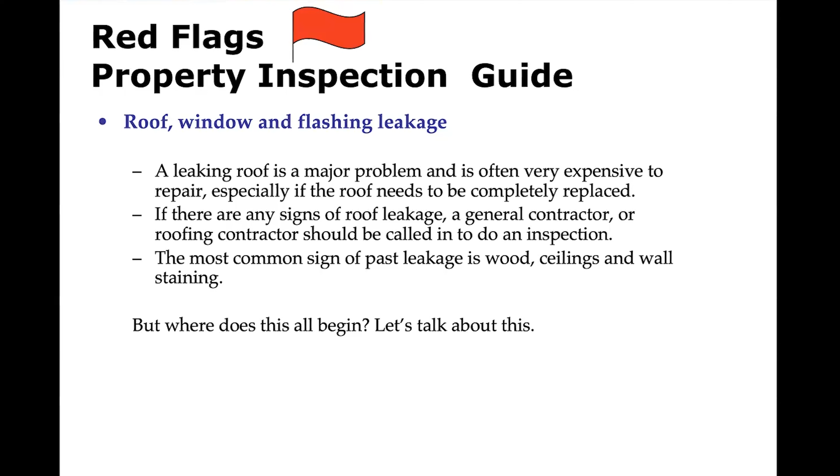Just keep an eye out for those kinds of things, and don't try to sugarcoat everything. Our job is just to report what we see. You don't have to tell them exactly what it's got on it. Just tell them it's an improper repair, and recommend a professional roofer come out to further evaluate it.

And we talked about the window flashing details. I put this in here because it'll show you some. Let me slow down for a minute. If we're in the framing stage of a house, we went out and did some in-field training with our videographer AJ and a couple of professional inspectors and manufacturers in Texas, and those videos will be coming out soon online. You'll be wanting to see those because they are awesome, some of the best video information I think you'll ever see.

Not excluding this one, of course, but self-adhesive flashing. During the framing stage, before the windows are installed, this type of flashing detail has to be installed. You see how they've done it in several different areas here, different ways, but they make a manufactured flashing that fits into the opening, and it overlaps the inside, goes up the wall a bit, laps on the outside, and then they come around and put tape around the outside of these windows and seal it. That makes a very good flashing.

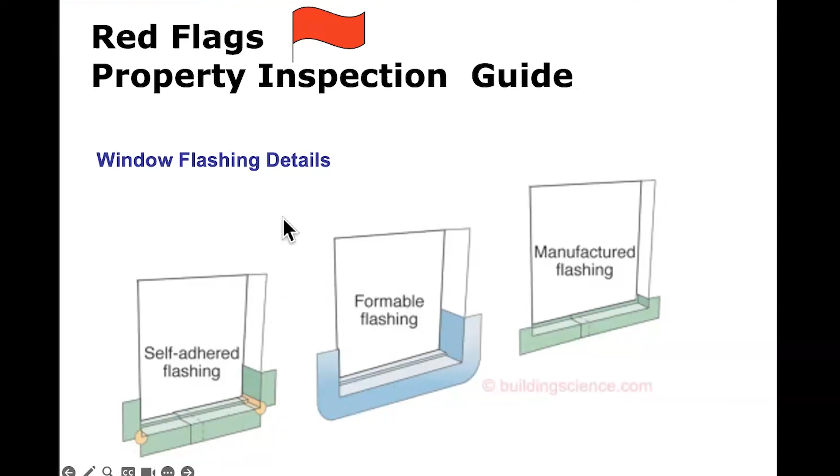But there's some that you can form to fit the window. These are self-adhesive, they stick, but it covers that entire bottom seal of the framing, up the wall section, and wrapped around the outside, and then we'll correct the rest of it as we put the seal around the outside of the windows. So during the framing stage, this is something you should see in all window openings.

Okay, window flashing leakage in a home constitutes a serious problem, can cause significant damage if it's not detected. A leaking window flashing is a major problem, often becomes very expensive to repair.

The most common signs of past or present water intrusion are wet stain areas, wet areas around the walls, baseboard, doors, windows, damaged wood, damaged ceilings, or even wall sections. And it depends on where the stains are at as to what may have caused that.

But sometimes in a ceiling, let's say you see a water stain - if it's a two-story house, it could be an upstairs bathroom over that area, close to that area. It could be a plumbing pipe ran in the ceiling space that could cause that.

The old galvanized water pipes are prone to leak during freezing. So if you've got freezing temperatures and pipes haven't been correctly replaced or insulated, they could cause water leaks. Those issues, if they go on long enough, cause major problems. If there's any signs of water intrusion, then a general contractor, and maybe even a mold specialist, should be consulted to do further evaluation.

We all know what mold looks like. Some states, like Texas, we're not supposed to tell them that it's mold if we see it. You can say it appears to be a mold substance or something, and recommend further evaluation. But in other parts of the country, you can use the word mold, I'm sure, without any problem. Texas has some really different rules and regulations than what some states do.

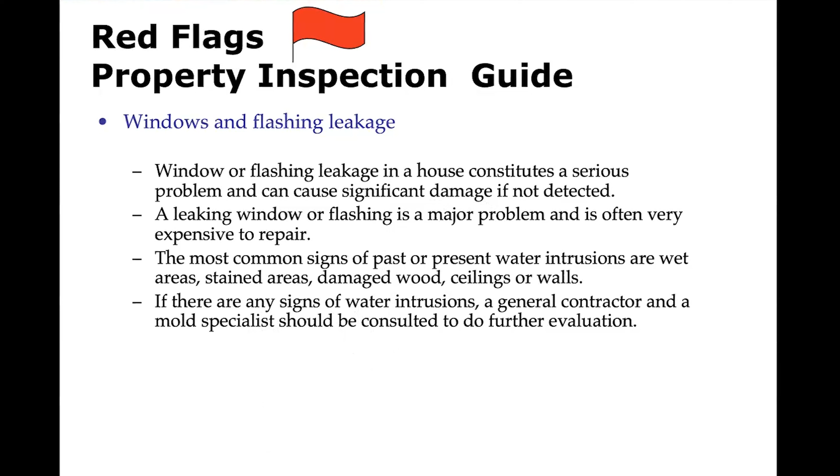So depending on what your area is, if you spot something that looks like mold, your clients are going to know what mold is just as well as you do. So just be cautious with how you say it, but you definitely want to tell them that there's moisture.

Mold produces tiny spores to reproduce. Mold spores enter through the indoor and outside air continuously. So mold is all around us. It's not only on the inside of a house if there's mold spores, but it's also on the outside. The mold people can check inside and outside and compare the difference in mold spores that are there.

But mold spores seem to land on these damp spots indoors. They may begin growing and digesting whatever they land on to survive. Molds can grow on wood, paper, carpet, the backing of the carpet, and even food products.

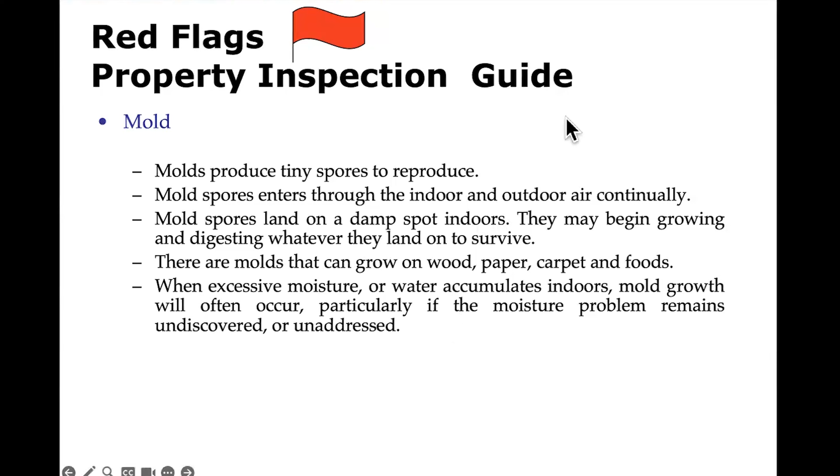When excessive moisture or water accumulates indoors, mold growth will often occur, particularly if the moisture problem remains undiscovered and unaddressed. Sometimes people cover up stuff. If they're selling a house, they will go to all types of extremes to hide moisture and mold because they don't want to pay for someone to come in and do the corrections on it, because at times it can get quite costly.

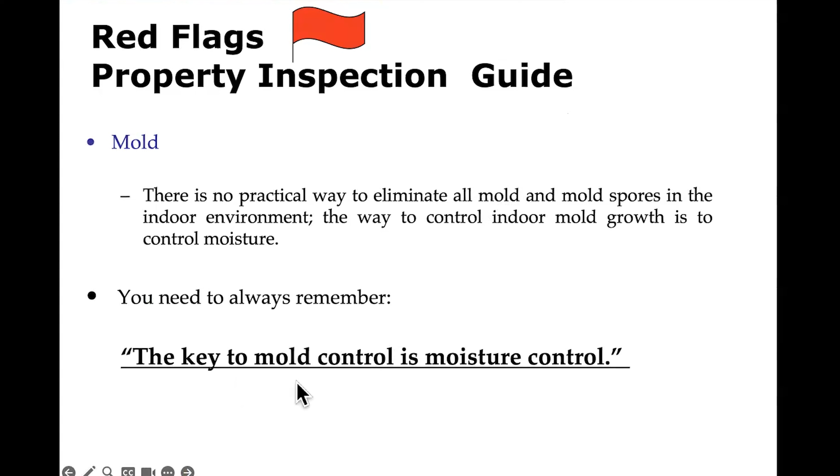There's really no practical way to eliminate all mold spores in the indoor environment. The way to control indoor mold growth is to control moisture. Stop the water, stop the leakage. You need to remember, though, the key to mold control is moisture control. Stop the water leakage, and you'll stop the mold inside.

Many areas are prone to mold growth, generally caused by water intrusion or even a plumbing leak. Many times, if a shower leaks in a wall or the bathtub drain leaks, if you open the trap area, the access to get into those sections, then you'll see that there's intrusion of water and the mold begins to develop. If it's not treated or taken care of, it becomes a very big issue.

Kitchen cabinets, one I've seen time and time again in my inspections. You open the kitchen cabinet doors, look underneath the sink. It had a mold smell that would nearly knock you out because it's so strong, because there was a water leak. And guess what? Nobody took care of the problem. So it continued until it began to develop into mold.

But if you spot something like that, it's not just going to be underneath the sink that you see it. The water will go underneath the bottom cabinet section, the board on the bottom of the cabinets. It gets underneath there, and then it begins to spread in areas that you don't see, but it's magnifying and getting worse and worse as the days go by without being treated. So again, the key to mold control is to control the moisture.

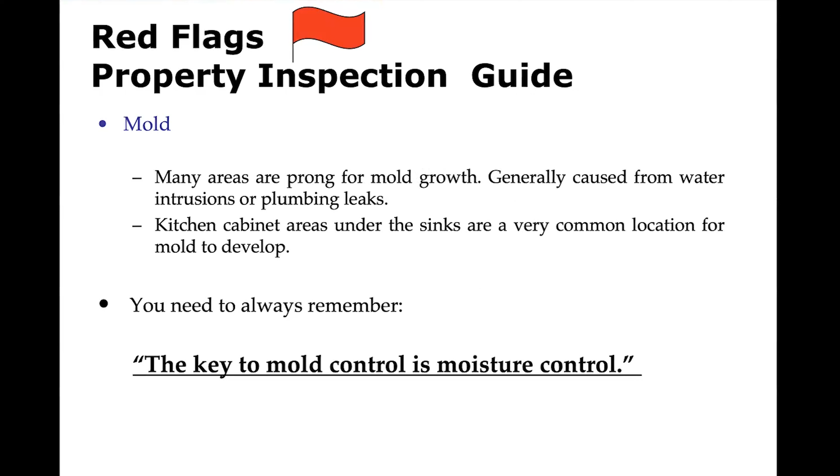Okay, we're going to flip over to stairs, handrails and guardrails now and go over some of this. The codes tell us that a handrail should be provided on at least one side of each continuous run of treads or flights with 4 or more steps. So if you've got 4 or more steps going up a flight of stairs, you have to have a handrail. Inside or outside, doesn't matter.

The handrail height shall not be less than 34 inches from the floor and not more than 38 inches from the floor. I think I said feet, I'm sorry. 34 inches from the floor, not more than 38. That's what most people, children, short adults, tall adults, can reach.

Porches, balconies, or raised floor sections located more than 30 inches above the floor or the ground shall also have guards of not less than 36 inches in height. Now, if you walk up there and you're an average guy, let's say 6 foot tall, and the guardrail around the porch or balcony comes up to your knees, then that's an issue, because someone could trip and fall, or someone could be shoved and fall right over it. So that's why the guardrails have to be 36 inches in height.

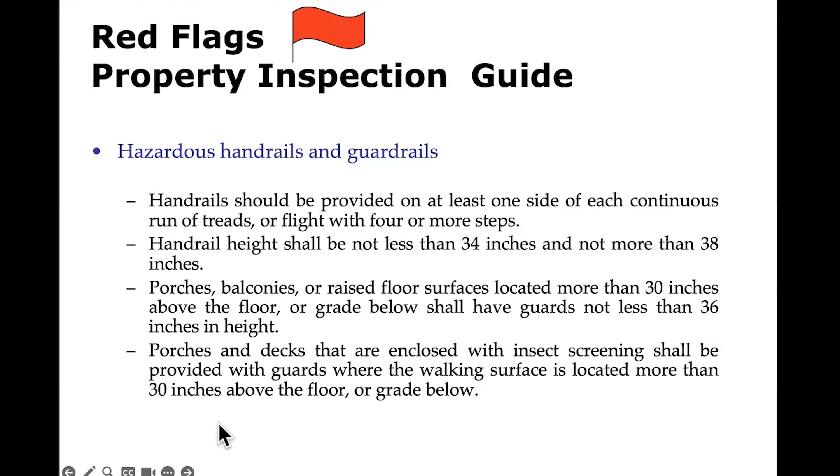Many times we see people put a set of steps up to a porch that they've added onto a place. And they forget to put guardrails. They forget to put handrails on the stairs. Well, everybody's not as balanced as you are in your younger years. A lot of times we could take a fall and not hurt us. As you get up in age, some people have handicap capabilities that can cause them to trip or miss a step and fall. But handrails are very important. So pay attention to these and keep in mind what these requirements all are.

Required guardrails on open sides of stairways, raised floor areas, balconies, and porches shall all have an intermediate rail or ornamental closure that does not allow passage of a sphere 4 inches or more in diameter. A lot of times the code will take a 4-inch round circular piece of styrofoam and use it to measure to make sure nothing any larger than that will pass through the opening.

The reason behind this 4-inch separation requirement is to protect small children, even small pets, that can slip through these openings and fall and injure themselves, or even worse, if it's on a balcony or elevated part of a second or third floor of a house. So the 4-inch rule is a biggie. You can take a tape measure and measure 4 inches, and you'll be pretty safe. But anything larger than 4 inches that passes through the openings of the stair rail, balconies, or the balusters should be written up. That's a red flag for you.

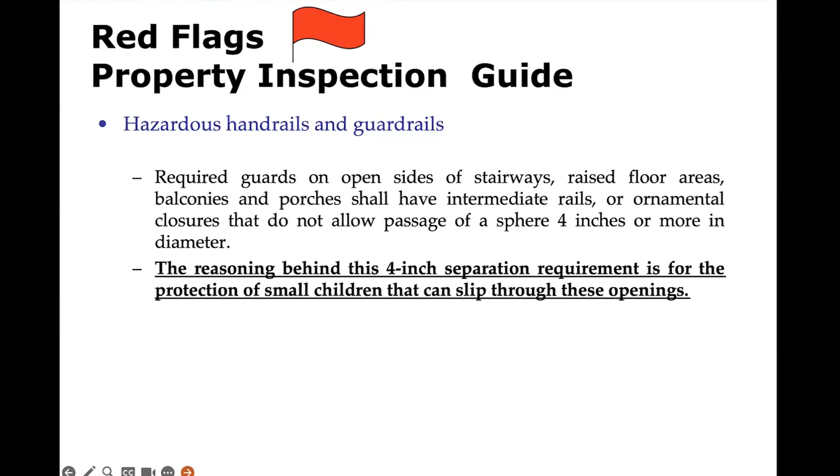Older construction, probably built before the 1990s, didn't have that same requirement. So some of them, I would almost fit through, the space was gapped so far. And there's a lot of ways that people can correct those. But again, as a home inspector, it's not our job to correct it or tell them how to correct it or what to do about it. It's our job to point out, hey, this could be a safety issue. We want to make you aware of it.

Handrail ends shall be returned or shall terminate in newel posts or safety terminals. Handrails adjacent to a wall shall have a space of not less than 1.5 inches between the wall and the handrail. This means where you put your hand around, you want to be able to get a full grip on that handrail. That gives you enough room for the knuckles of your fist to bend and wrap around the handrail and hold on to it.

The end where the handrail returns, at the bottom or the top of the handrail, can't just be open. In other words, you don't want it where a lady's purse strap or loose clothing could get caught on it and cause someone to trip. Those ends have to turn and go back and touch the wall. So if you have a straight handrail, the very end of it is going to make a 90-degree turn and go back and end at the wall. That's what that's telling you.

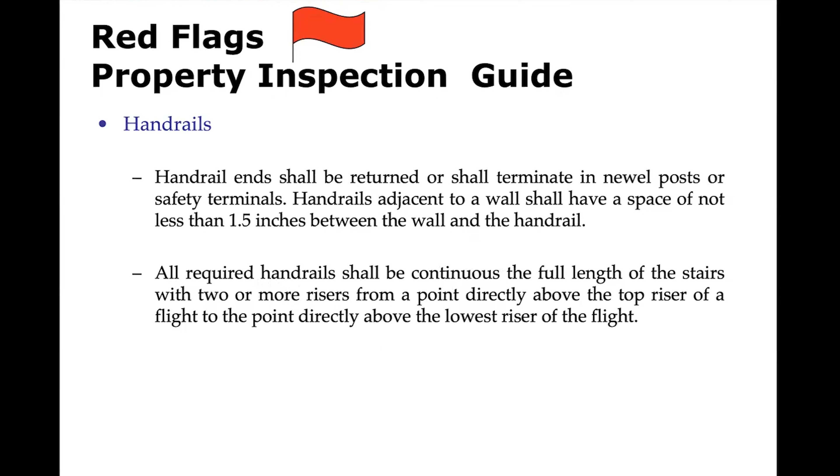All required handrails shall be continuous the full length of the stairs with 2 or more risers, from a point directly above the top riser of the flight to a point directly above the lowest riser of the flight. In other words, if you have a set of stairs that goes up, it has to be a continuous handrail from top to bottom. If you have a staircase that makes a 180-degree turn, the handrail has to be continuous on that one side, so people can go up and be safe. So handrails are very important. All handrails shall be one or more of the following types or provide equivalent graspable.

And I will read this to you in a second. I mean, we're quoting you some code items here, but these are code items that are safety issues, red flags for you. I can tell you many times I've seen balconies, from the outside staircase going up to a balcony, to a porch, to a deck. A lot of times people like to take a 2x4 and lay it on top so people can grab.

Well, the problem with that is it doesn't meet the grippable size. You can't get a good grip. Most people with small hands cannot grip a 2x4 laying down flat. Some builders will take one and turn it up on its edge and nail it to the side where people can get a hold of it. The problem with that is you really can't get a full grip. You can hold on to it, but you can't get a grip.

So this just tells you the type 1, the handrails with a circular cross section shall have an outside diameter of at least 1 1/4 inches. That's 32 millimeters, and not greater than 2 inches or 51 millimeters. If a handrail is not circular, it shall have a perimeter dimension of at least 4 inches and not greater than 6.25 inches, with a maximum cross section dimension of 2.25 inches.

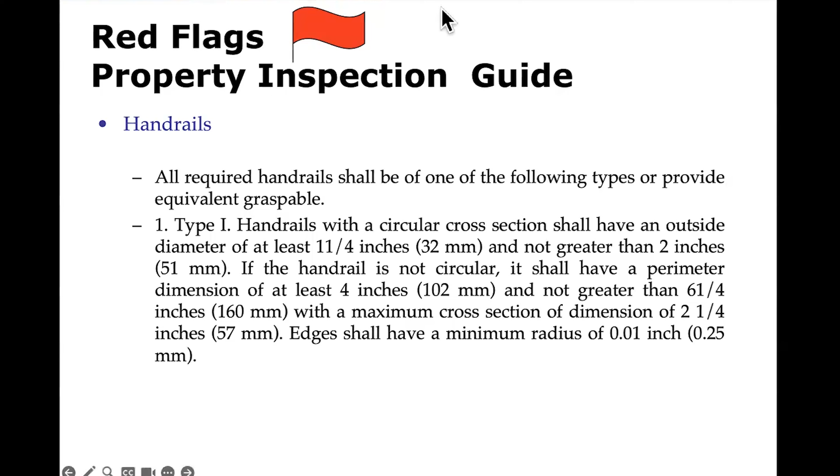The edges shall have a minimum radius of 0.25 millimeters here. So it's just telling you the sizes of a handrail. Basically, if you can't grip it, your clients probably won't be able to grip it. And that's something you probably want to make a note in your report on.

Type 2 handrails, they get to be a little different. Perimeter greater than 6¼ inches shall have a finger recess area on both sides. In other words, as your hand grips it, you want to have something for your fingers, kind of a claw effect, if you would. Let that claw get in there and hold on. So this is what this is telling you about. And it tells you the sizes of it that you'd have to get a hold of.

Now, let's go into stairs. We're talking about handrails. Let's talk about stairs for just a little bit. And remember, you can go back and watch these videos as often as you like and compare notes to it. And this one I'm going to refer to the International Residential Code, section R311.7.1, that talks about the width of the stairs.

It says the stairways shall not be less than 36 inches in clear width at all points above the permitted handrail height and below the required headroom height. So you have a certain handrail height, what we talked about, then you have a certain required headroom height. And headroom means you don't want to bump your head as you walk up the stairs. But there's your code reference on it.

Now, headroom, which is the headroom height required in the paragraph above, says the minimum headroom in all parts, not just some, but all parts of the stairway shall not be less than 6 feet 8 inches, measured vertically from the sloped line adjoining the tread nosing or from the floor surface of the landing or platform on that portion of the stairway. And this is the International Residential Code section R311.7.2. Now, if you notice, those kind of go hand in hand with each other.

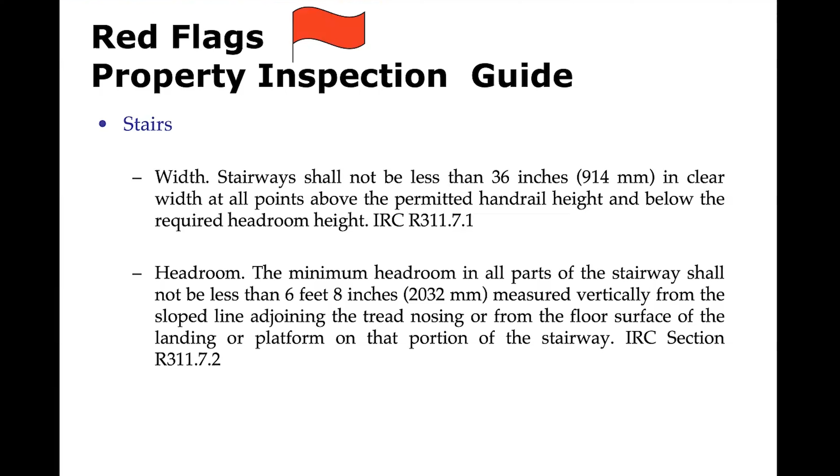And in doing so, they furred that ceiling down further into the space of the stairs, making it where your head would actually bump the top of the wall, top of the ceiling where it turned for the return air chase. Basically, as you're walking up, no part of the stairway should be less than 6 foot 8 inches. So unless you're a real tall person, you should be able to walk in and not touch any part of that ceiling.

The other important thing is that you don't get hurt or someone has a personal injury. The other part of that is they're carrying furniture up and down those stairs, mattresses, dressers, chests of drawers, any type of bookcase, whatever. They want to have room to carry something up without causing damage to the property. So that's very easy to miss on an inspection, but it is kind of a minimum standard that you should be able to see.

And if it doesn't meet those requirements, you should write it up as, it doesn't meet current building codes, and let people know. We don't expect people to go back and correct a home that's 50, 60, 70 years old to new codes. We don't expect that. But some of this stuff comes up as being safety issues and red flags for you as a home inspector that we need to at least make a note of in our reports.

Okay, the landings for stairways. The codes again refer and say there shall be a floor or landing at the top and bottom of each stairway. So at the bottom and the top, there's got to be a landing for it. There should not be any doors that open over a stair step.